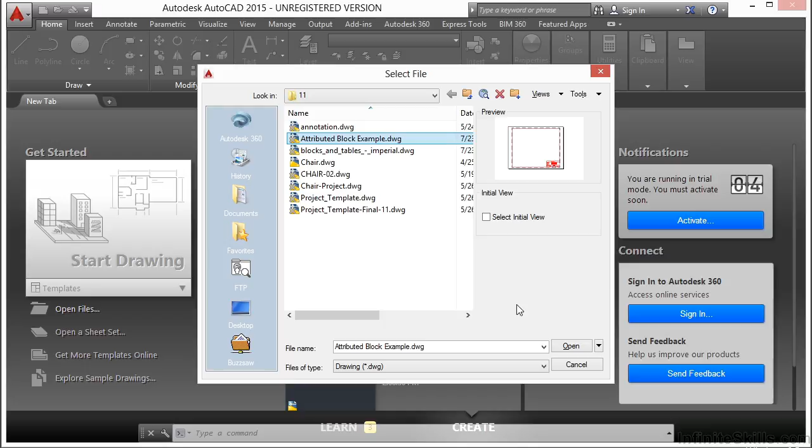Let's open up the attributed block example file. This file contains an attributed block that has been inserted as a title block for this drawing. It's right here. So you can see when I hover over it, it looks like it's a block. When I select it, there are a lot of different grips in here.

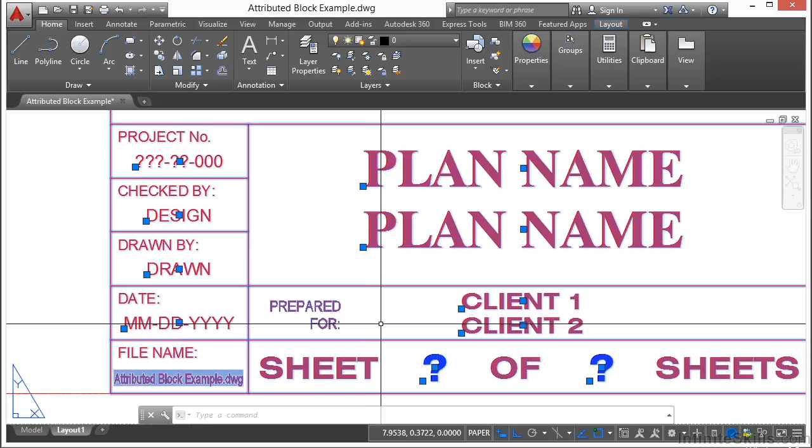That's for the attributed text. This item here that says prepared for, that's just regular text. I can't edit it or change it or do anything to it. Now to edit the attributes of a block, you can double click it. That brings up the Enhanced Attribute Editor window.

Here you can edit the text to display what you need it to. We drag this to the side. Here you can see this attribute has a tag. It's called plan, and you're prompted with a plan name number 1 and the value. Plan name or value here is the actual text that is displayed in your drawing.

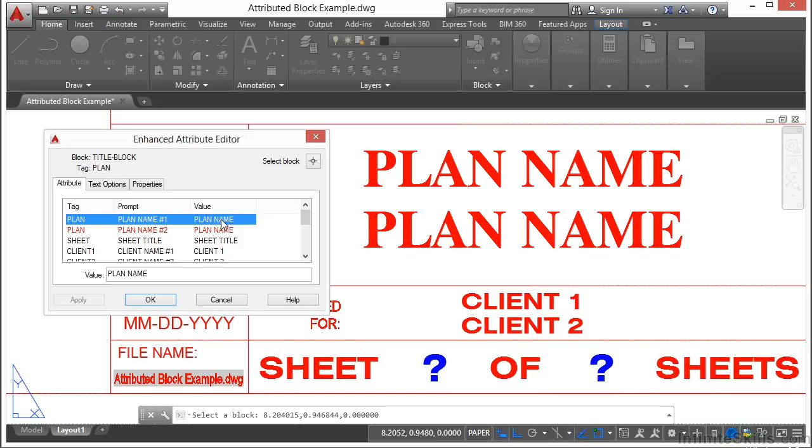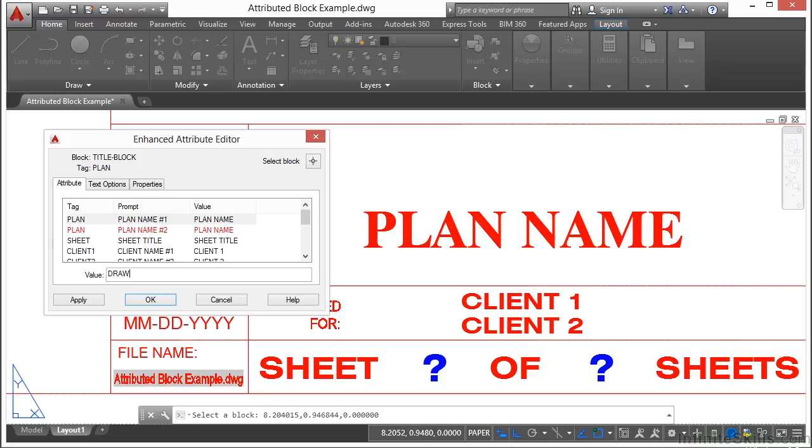To edit that, I click in this box here, and I just change it like I would in any regular text editor. I'm going to call this drawing title. When you're finished, click OK, and you've changed the text in your title block. Title blocks are very commonly used with attributed text. This allows everyone's title block to be formatted exactly the same way and give your drawings a uniform look.

Now here's a quick tip. If you only want to edit one field of data, hold down the Control key and double click on that text field. When you're finished, just left click somewhere off on the screen.

Now if you double click it, this gives you access to everything here that you can change. I can call this sheet title as an example, which is right up here. I can say whatever I want it to be. When I'm done, press enter.

Client name, I can just say ABC Company. Click OK, and you can see here that I've changed some of the information on it. Now let's say, for example, I only need one of these lines. That's easy enough. Put a space in there, and now it looks blank.

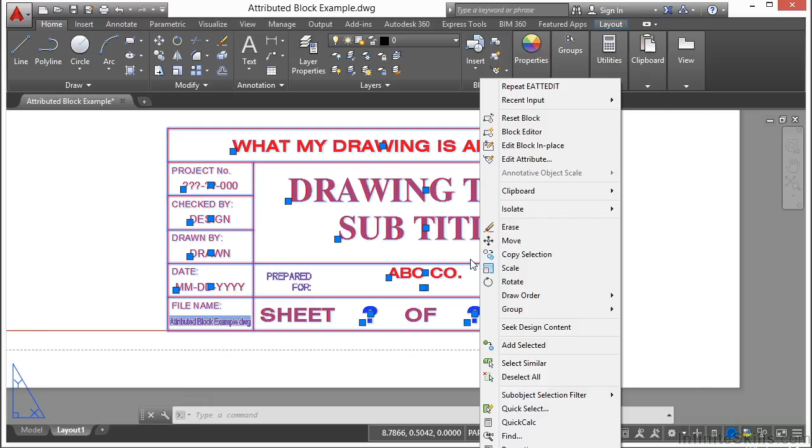Now to create an attribute in a block, you have to create an attribute definition. It's sort of like creating text, only there are a few more definitions to assign. So let's edit this block right here. So select it, and then right click on it, and go to the block editor.

I'm going to close this because we won't really need that. It'll just going to get in our way. Each one of these objects here are attributed text. If I double click on them to edit them, I get these three options.

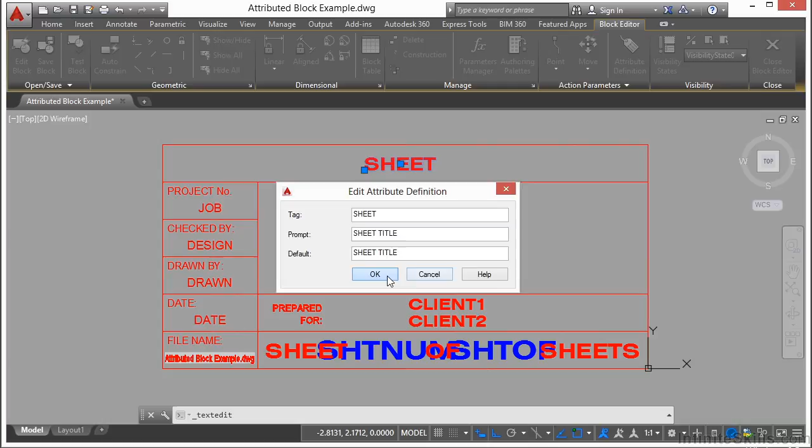I have the tag, the prompt, and the default. The default will automatically fill in this information for you so the user doesn't have to. It's sort of a placeholder. When you're finished, just click OK. Now these have grips so that I can position them however I'd like.

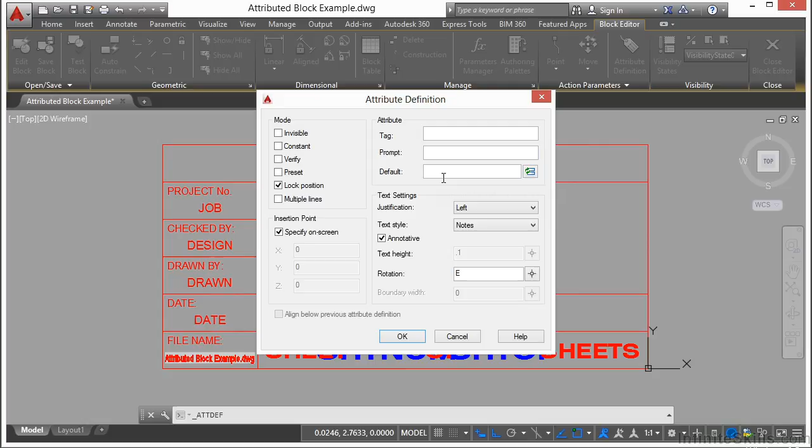If I want to create a new block attribute, I just come up here to the attribute definition in our block editor ribbon. This is the attribute definition. I have a lot of different items that I can pick from here, like justification, text style. I can make it annotative or not, and I can change the text height. Mostly what you're going to do is enter in your tag, prompt, and your default information.

So let's say I want to make a tag for location. A lot of times you're just going to enter in the same thing, location, location, location. Now when I click OK, it wants to know where I want to put it. I don't really have a spot for it in my line work, so I'm just going to put it right over here, just for now. And that's where it is.

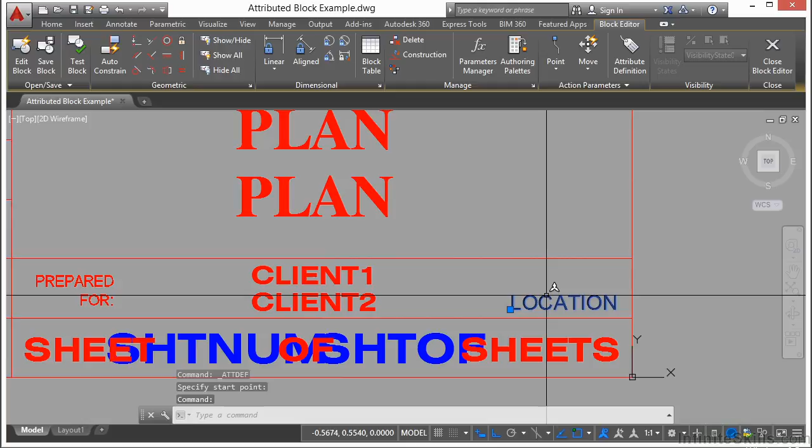Now you can also look at things like layer, size, etc. Let's select any attribute. I'm just going to pick the one that I just created. Right click on it and select the attribute order option right here at the top.

Now this window opens up the attribute order window. This will allow you to edit the order the attributes will be listed when you edit the data fields of an attributed block. It doesn't physically change them in any way, just the order in which they're listed.

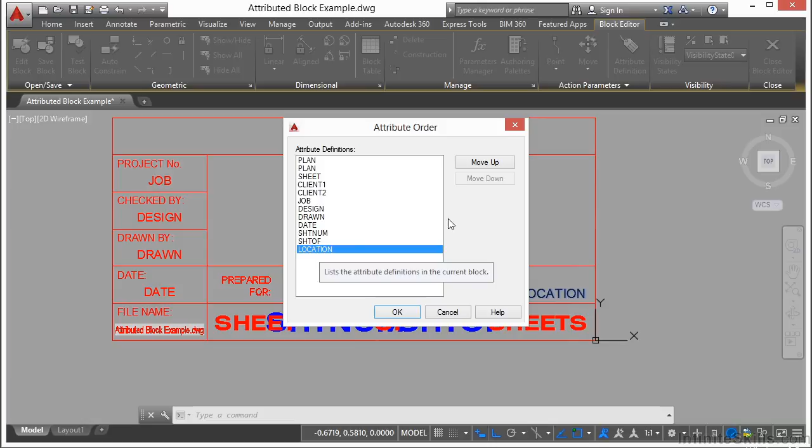So I put location last, so it naturally goes to the bottom. But let's move it up after the client names. I'm going to put it up here. So I select it, and then I click the Move Up button. Click OK, and when I'm finished, I'll click the Close Block Editor button.

Save the changes to the title block, and you'll notice it doesn't look any different. Where is my location option? Well, there's something that you have to do when you edit an attributed block.

You have to use a command called Battman. No, I'm not making it up. It's B-A-T-T-M-A-N. It stands for Block Attribute Manager, or Battman.

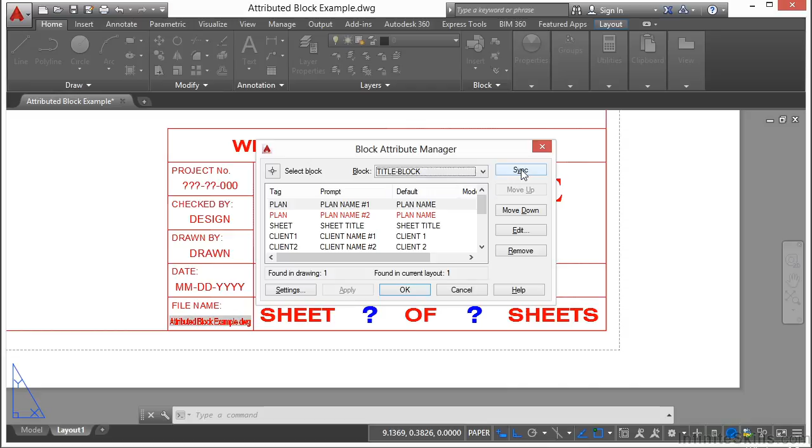Once you open up Battman, find the block that you just changed, that's title block, and then click the Sync button. That will update every instance of the attributed block in your file. I would wish that it would do this automatically for you, but it doesn't. So you have to do that every time. Don't worry, it will be there.

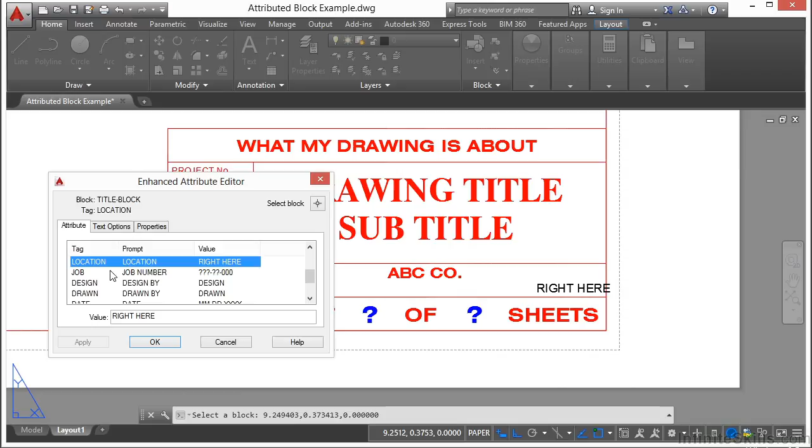Now we can edit our location right here. If something like this happens in your attributed text, just double click on your attributed block, find the tag that you want to change, go to Text Options, and you have some abilities here to change a few things.

You can change the justification, and that might move it. You can change the text height, and you can even change the rotation. You can make it annotative or not, and you can even change the width factor. There are a lot of times when I've shrunk the height inside something just to make it fit better. It happens. You can also change some of the properties of it right here as well.

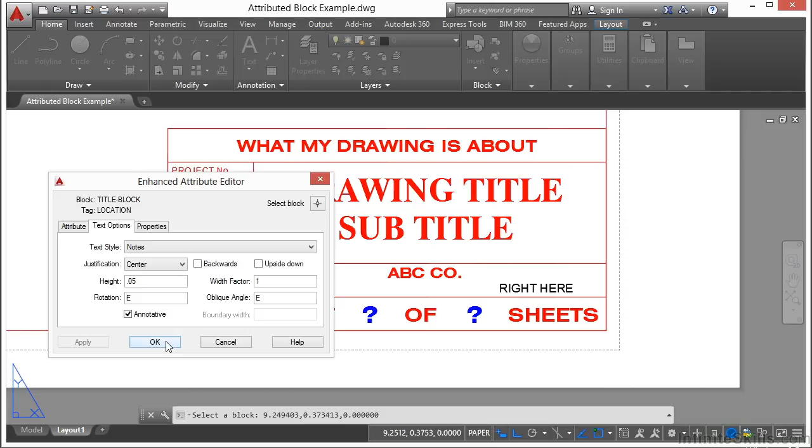When you're finished, click Apply and OK. So that's attributed blocks, and a very common use of an attributed block is a title block.